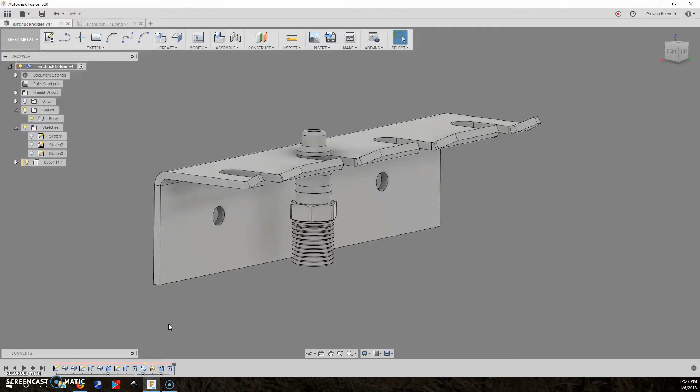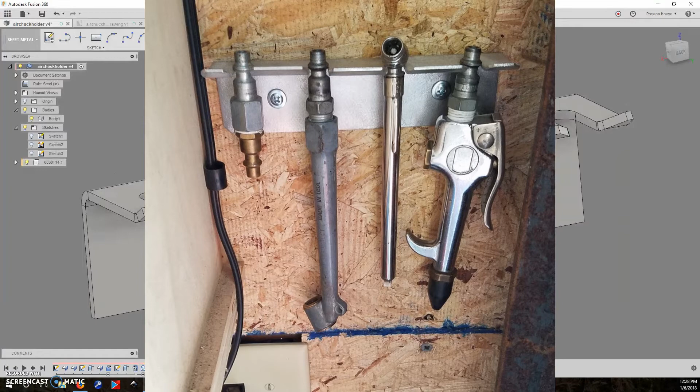Today we're going to start one of a series of sheet metal projects that I'm going to share with you. There aren't a lot of projects out on YouTube for sheet metal beyond how to build your own sheet metal bender. We're not going to do that. This project is going to be just a small hang-on-the-wall rack for my air chucks, or you can use anything that has a quick disconnect fitting on it.

This is the standard quick disconnect most people are running. If I can find what number that is, I'll share it with you. It's not critical for the design except in this dimension right here. I'll fabricate this in a second video.

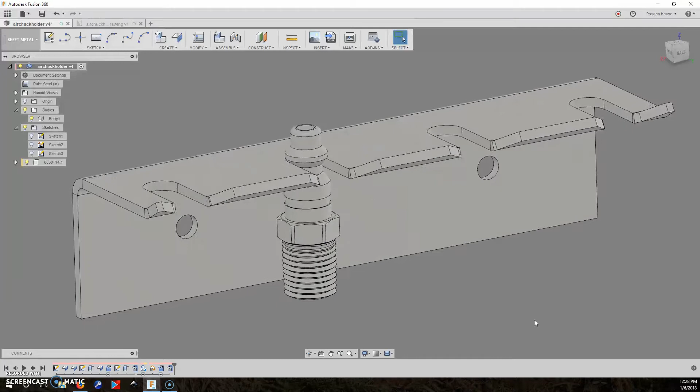This video I want to concentrate on drawing it in Fusion 360. I want to share with you some of the things I've learned around workflow and the sheet metal capabilities that are now baked into Fusion 360, as well as probably another tip or two as we go along, things I've found in the past that are helpful.

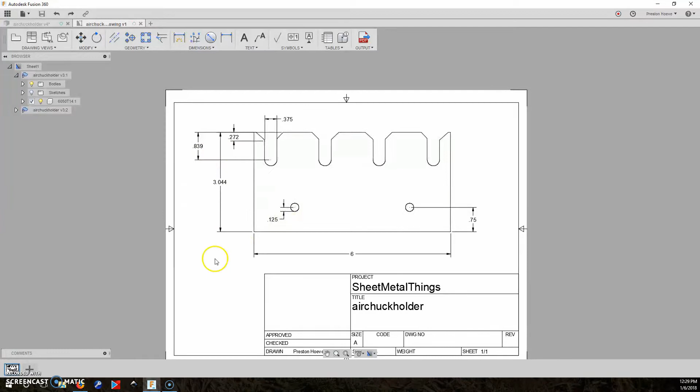Take a look at the drawing. In the drawing I've made from this original, it's basically 6 inches by 3 inches. All of these funny numbers start coming around because when you dimension in the drawing tools, it takes into account the additional material that's been put in for your bend. So now that you know what the goal is, let's get started drawing a new one.

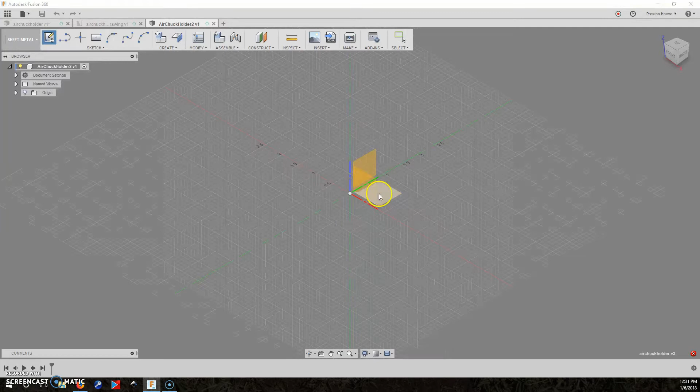We'll start a new design, and the first thing we're going to do is save it. We're going to start by creating a sketch, and what we're going to sketch is a center point rectangle, and we're going to make it some dimensions.

One of the first things that I'm going to share with you is the workflow that is becoming ingrained in my system. That is to start much like I do a woodworking project and just start big. In woodworking, a lot of times your first cut's a rough cut and you refine from there. So we're just going to draw a rectangle of some size.

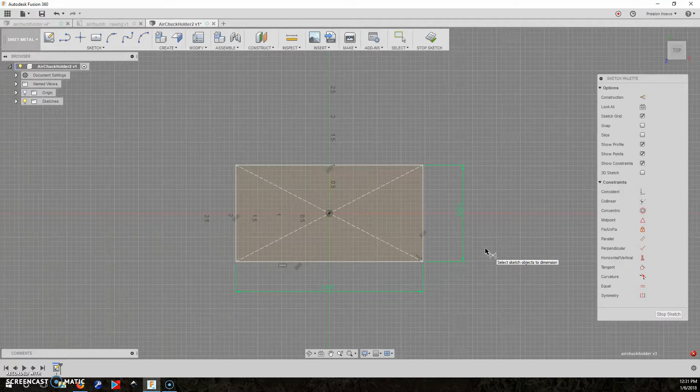And then I'm going to give you the next tip. When you're sitting down and you're drawing something like this, you don't probably already have all the dimensions. You're sort of designing on the fly, and these numbers are variable. That's the key. If there are variable numbers to you, then they need to be variables in the system.

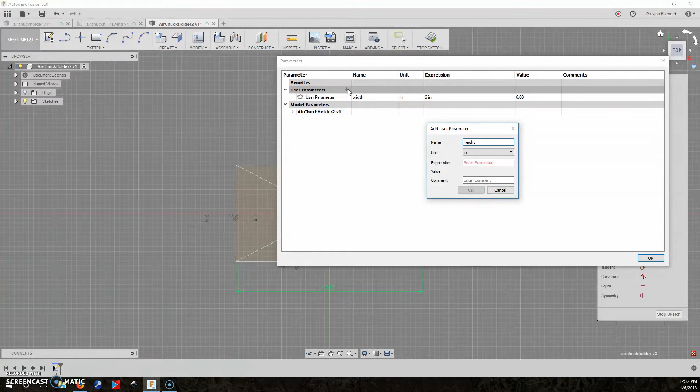So let's create parameters for some real simple things. We're going to say width, and I'm guessing it's going to be 6 inches. We're going to create the height, and this will be the height of the leg on the back. We're going to go with 2 inches, and again, I'm fairly good guess, not 100%.

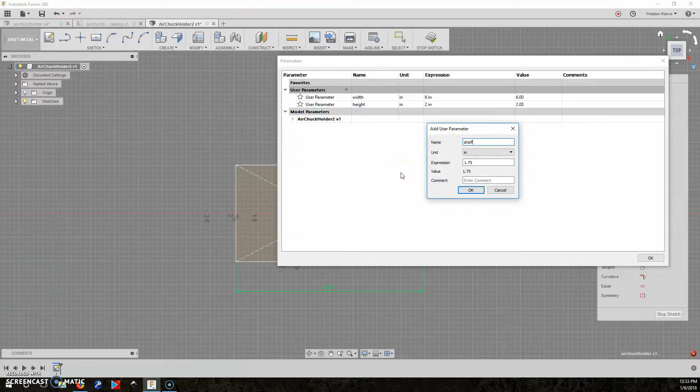The last thing we're going to do is width, and this is going to be the width of the part that comes out from the wall. That's how I'm going to consider this. We'll call it 1 3/4 inches. Oh, it won't let me call it width, so I'll call it shelf. Although it's not really a shelf, there it is.

So now we have 3 dimensions. We're going to put those in here because they are most likely going to change. We're going to assume that this is the top, looking down on where the holes are. Alright, so real simple rectangle.

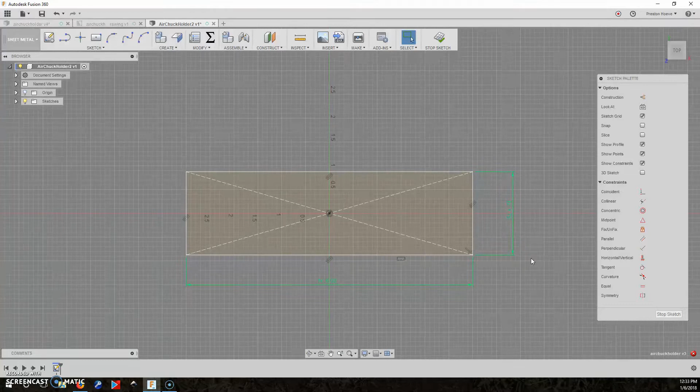In sheet metal, you don't extrude. In the sheet metal tools, we're just going to stop the sketch here, and the first thing you do is create a flange. The flange we're creating is this surface right here, and really what we're doing is we're giving it some thickness. There's a series of rules here, and we're going to use steel inches.

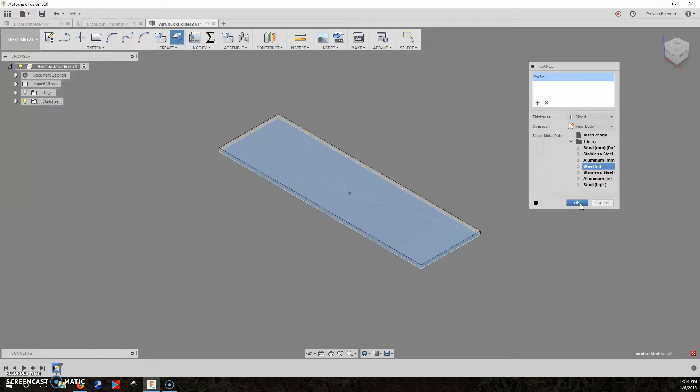I'm not going to get into these, and honestly I don't quite understand them all just yet. There are a couple other videos out there that get into these. Lars does one, but for now we're just going to go with the generic. So I've told it it's a flange, but there is the first piece.

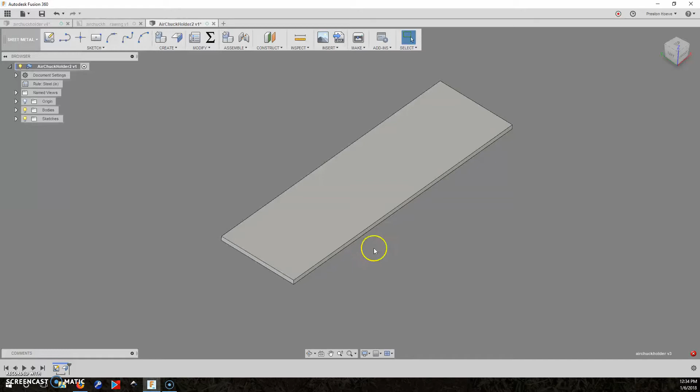So this is the top. Our holes are going to be in here. If you have geometry that's going to cross a bend, much like where the slots and the holes cross the little lifted tab and go down into this part of the body, you want to bend everything first and then do your geometry and your holes and your other sketching and extruding later.

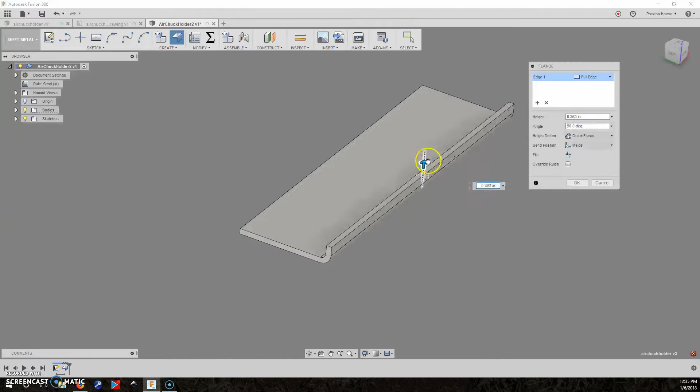So we're going to do 2 more flanges. We're going to click flange, we're going to choose this edge, and we're going to pull it up. When we pull it up, we can give it some distance. We're going to just say it's 1/4 inch. That's solid enough in my mind.

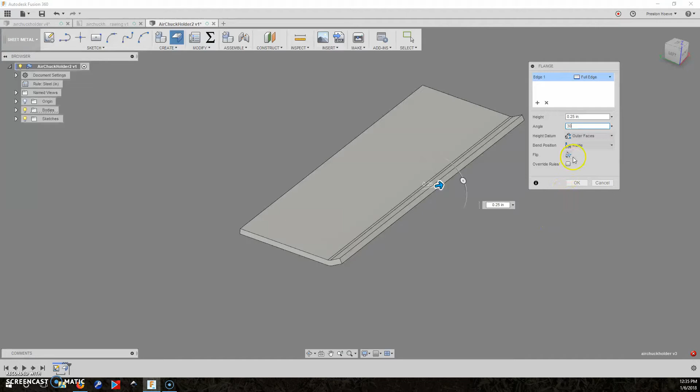I'm not going to make a variable out of it, but we only want it to go up at about 30 degrees, just a little bit of an edge to keep things from sliding back out if it's not perfect. At this point, the bend position's on the inside, and we're good to go. The next flange we're going to add will be back here, and this is going to be the height, or what we called the height there.

This is what we called the height, isn't it? Seems big. Yes, it's the height, and there it is.

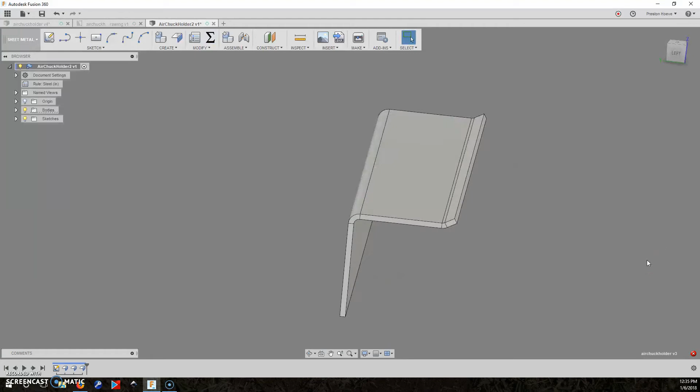So now we've bent it all up, but we haven't done any drawing yet. The reason why is you can't draw on the surface and then want to bend it. There's no concept for bending something that's already there. You have to actually create the flange on the fly.

So here we go. Everything looks pretty good. Now I can tell you right away that the height in the back is way too big. I'm going to look at a ruler and say, yeah, that's going to be maybe 1.5 inches. Alright.

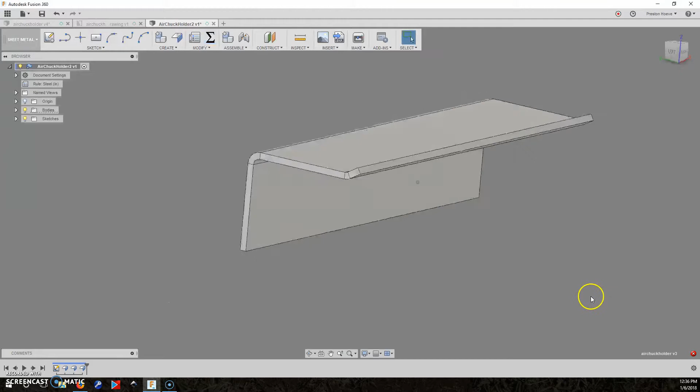That looks better. So the first thing we're going to do now is punch a couple of holes in the back, and these are real simple. We're going to make sure we're actually on the surface - that can bite you in the knees later. We're going to draw a circle, somewhere in here, and then draw another one over here.

I intentionally started drawing these out of alignment and relatively different sizes, so as I apply dimensions and constraints, you can see them better. We're going to dimension this circle right here, and make it 200 thousandths. I know I have a punch for that.

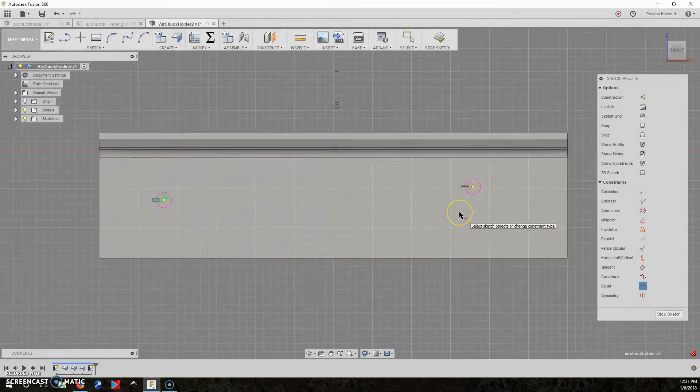Now this is where making them different sizes is really handy. We're going to make the two circles equal in size, and I saw the big one jump to smaller - much better.

Now we're going to dimension this one here from the side. Oh, let's come in there. Again, I'm just looking at a ruler trying to decide. Let's come in 1.25 inches.

And we're going to do the same thing here, so we're going to dimension that. But we are going to go over and click the first dimension, and now they're dependent. Next thing we're going to do is dimension up from the bottom.

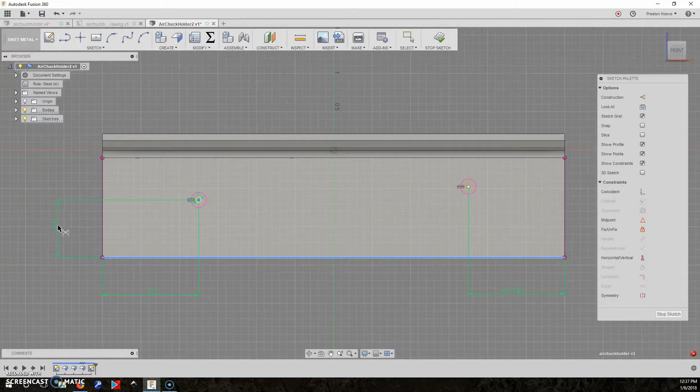And this is 3/4 inch - it's fine. It's a little high, but good enough.

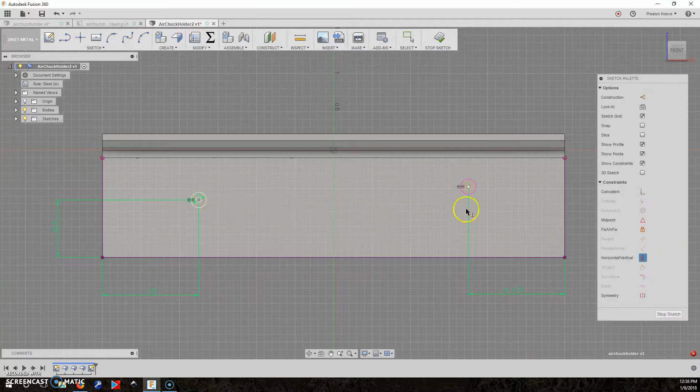And then we could dimension this one the same way, making it equal, or in this case what we're going to do is make them horizontal vertical, and it will move this one. Alright, they're both white, which in mine means they are fully constrained, and we're good to go.

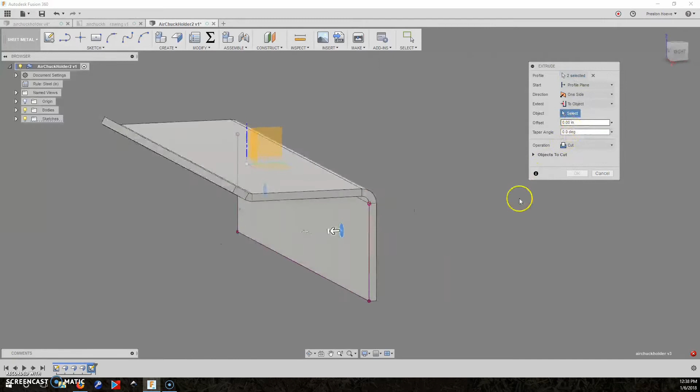I can no longer move these around. So, real simple, E to extrude, grab these two items, and we're going to do a to object, and we're doing this to the back side, and we're going to say okay.

The reason we do to object is because if we get in and monkey with the settings that develop this width here, we want to make sure the holes continue to go all the way through. Alright, so we got that one done.

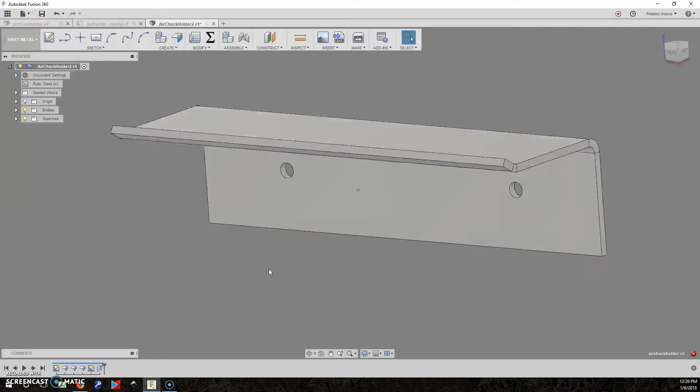Now on to putting in the holes and slots in the top surface. Lars Christensen did a good video when sheet metal first came out, which wasn't long ago, and he showed what I'm going to show as well.

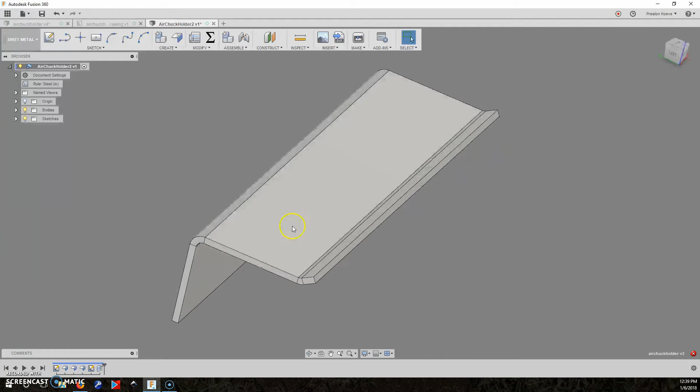So for another way of looking at it, I'll link his video in the description below. But what we want to do is have that circle and the slot, and then the tapered part of the slot span between this surface and this tipped up surface.

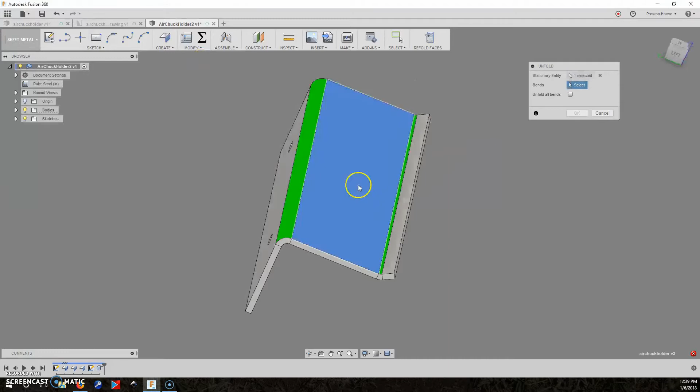So to do that, the first thing we have to do is flatten out or unfold our model. The stationary entity is going to be this one, and we're going to unfold just that edge. We could do them both, but it really doesn't matter, so we're just going to do this one right now, and we're going to say OK.

Now we're going to create another sketch, and we're going to create it on this surface here. We're going to project through into this sketch this line.

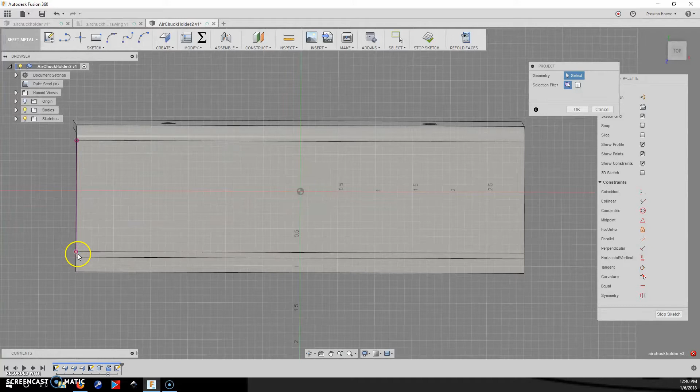This one, this one, this one, just the outer perimeter, this one, and so forth, all the way around. Alright, so we've projected those through.

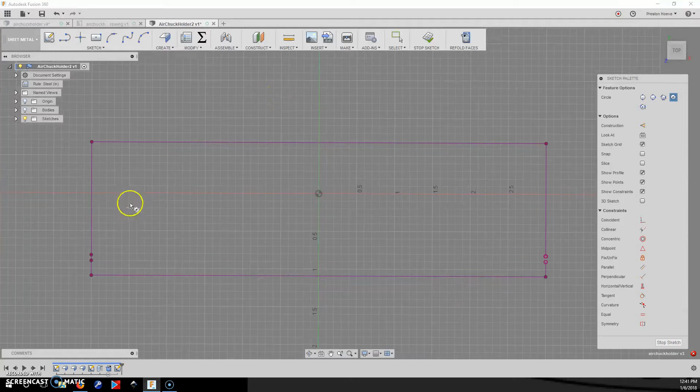We're going to get rid of the bodies behind it, so what we've got now is just that surface. We're going to start by drawing some circles - we're going to do about 5 of them, and again you can see they're all - actually I think we're going to do 4.

Now I know, because I've measured those couplings, that I want this to be 3/8 of an inch. That'll make them hang very nicely.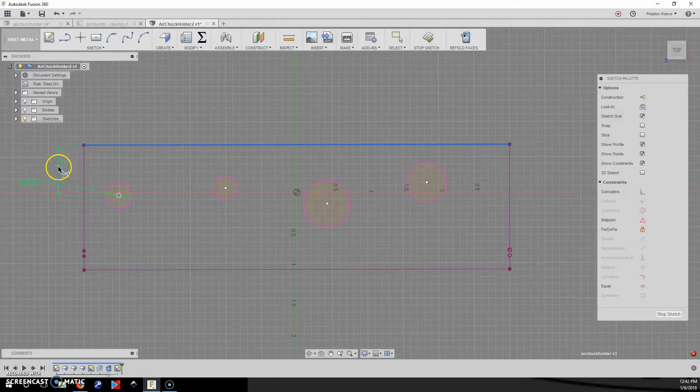We're going to focus on dimensioning out this first hole right here. So we're going to dimension this out from the back, and we're going to come out half the width of the shelf divided by 2, and I don't like that because the fold material is being taken up. So we're going to do 0.75 here. That looks better. 3/4 of an inch there.

Okay, we'll add one more dimension. Lock this to the side, and we'll set this at 1/2 inch. Looks good to me. This is where the initial drawing of things being different sizes allows you to quickly see that your dimensions and what you've meant to do has actually happened.

So we're going to use this little trick where you can go over and, instead of typing in a dimension, click another dimension already there, and it's now dependent. You can see it's now a function of that other one. So we're just going to do that on all of these.

The other way we could do this is to use the equal constraint, and we'll just do that real quick, take these out, I can make them bigger. The nice thing about the equal constraint is you can't hide dimensions inside a sketch. You can hide sketches and hide dimensions after you've left them, but not while you're drawing. So the fewer of these you have laying around, the less cluttered you are.

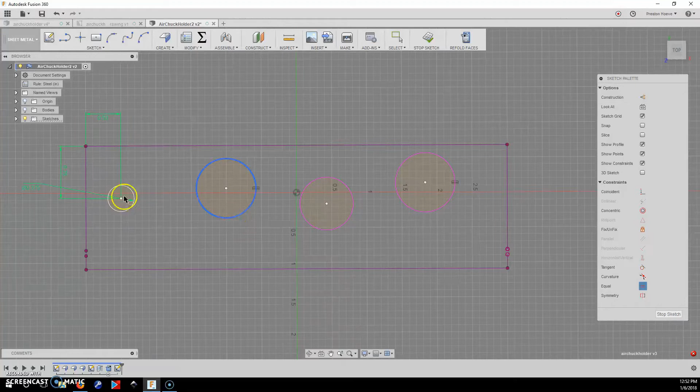So we're going to use the equal constraint, and we're going to say this circle is equal to this circle. You see it jumps in size really quickly, so it's real easy to tell that, yeah, I got what I wanted. And that one's already had an equal on it.

So now that we're done with those, we're going to do some other things. We're going to make all of these horizontal to each other. So we're going to pick horizontal vertical, and pick the center point of the circle. Again, because I drew them all out of whack on purpose, I can see them jump real easily into line, and I know I got what I wanted.

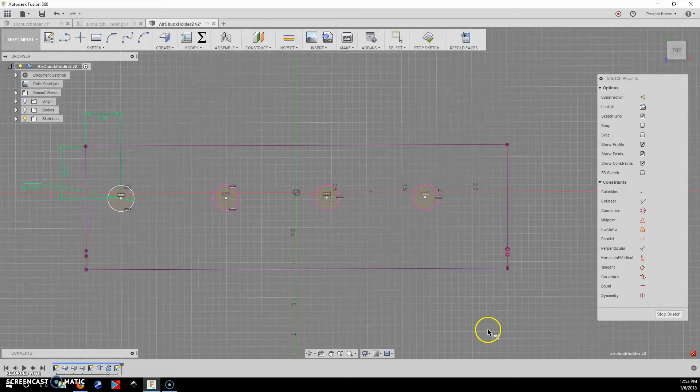So the next thing we're going to do is add some dimensions between these circles. And we're going to start with... let's try, no, that ain't going to be right. I can tell just looking. This is one of these deals where, to follow my own rule, this should be a parameter.

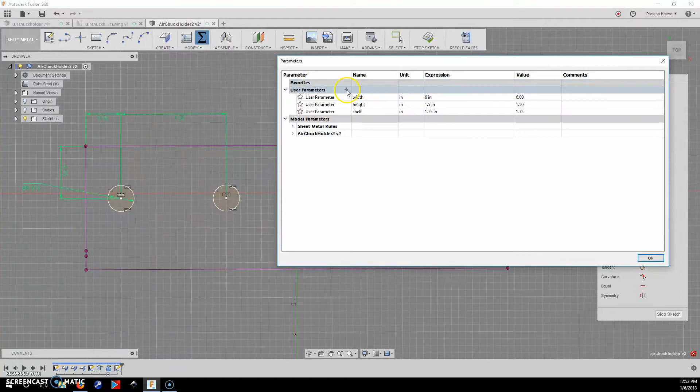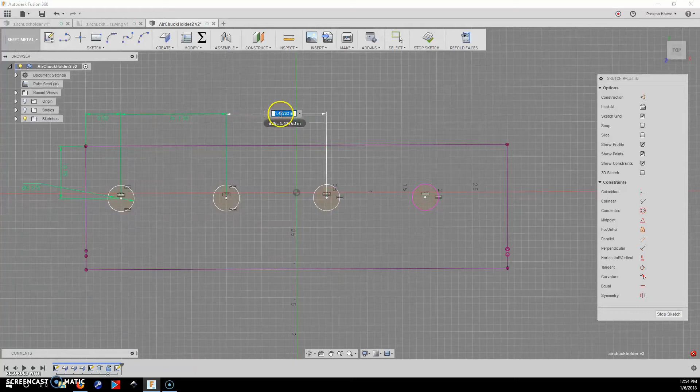So we're going to add a new parameter, and we're going to call it hole space, and we're going to call it 1.5. Change this here to hole space, and we're going to dimension from here. We're going to go from here to here and up, and I could either type hole space again, or I could go over here, and now we have actually two levels of dependency: from these two holes to this dimension, and from that dimension to the actual parameter setting.

Now we're going to add one more dimension, down here to the end. Fusion's going to tell me that I'm over-constraining, but I'm going to say I want to see it anyways, so I can look at this and say, well, that's an inch, this is 1/2 inch. If I change this one to 3/4 of an inch, boom, they all move over.

Now, if someone knows how to create that equal spacing between objects within a distance, leave a comment below. That'd be kind of interesting. I wanted to do that the other day too.

Alright, moving on. The next thing we've got to do is draw in the slot and then the tapered opening. So we'll create some simple lines. Again, they're not in the right place.

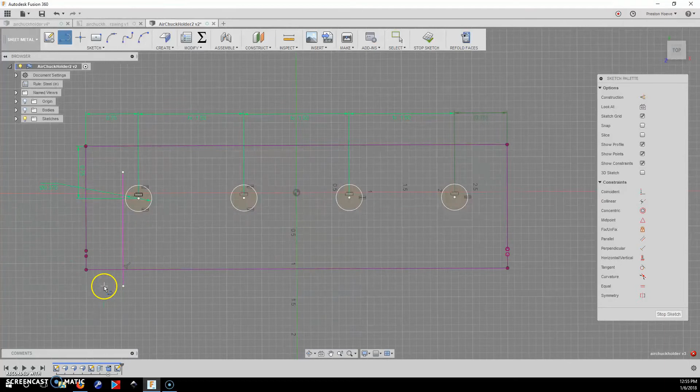So now that we have the lines all in here, we're going to make them tangent, because we want them to run right up next to the side of that circle. This is, instead of moving your geometry, you're letting the constraints move it for you. Again, I drew them way out of place so I could see them very easily snap into where I wanted them to be. Alright, so there we go.

That's all of those. We can leave these hang out here. We don't really care, or we could bring them back and constrain them if we wanted to. We could say that this dot here is coincident with this line, and we could keep doing that. It's not important, so I'm not going to bother. We can still select or see these two major areas, and that's what we want to be able to extrude.

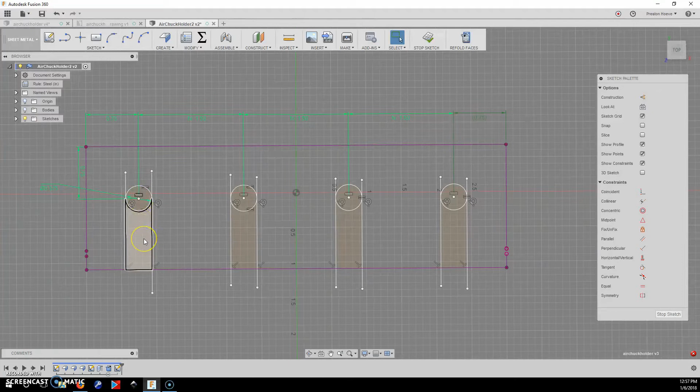So the last thing we're going to do is create another line, and we're probably going to try this a couple of different ways.

We're going to do two lines like that and say we're done. Then we're going to dimension from this line to this line and pull out here, and we're going to say that's 90 degrees.

Now we're going to create another line, and we're going to come off that center circle down through the bottom, and click it one more time, and click construction over here, or I could have done an X.

So now what we can do is say that this point here is coincident to that line there. Then we can do one more dimension, from this line to this construction line. Come on, you started to come out there the way I wanted it. Now we can do one more dimension from this line to this construction line.

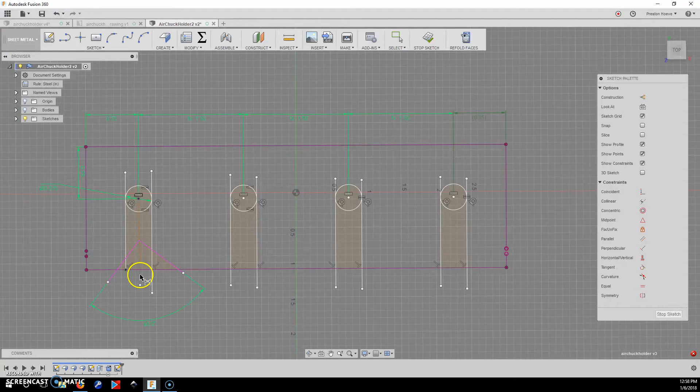And why are you not playing nice? There we go. We're going to say that this is 45 degrees. So now it's locked into that center. It's 45 degrees to the center line. The two lines are 90 degrees to each other, or we could have put a perpendicular constraint in there if we wanted.

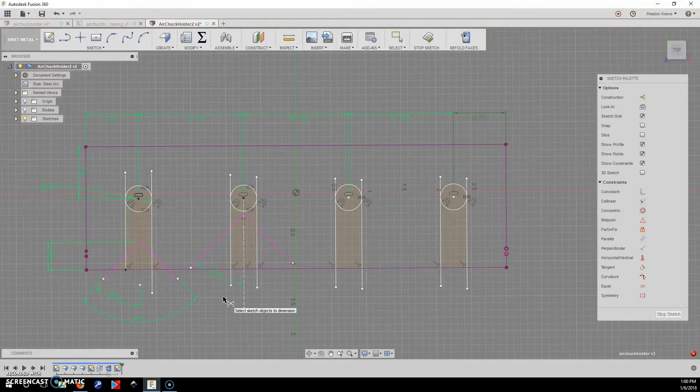So now what I need to do is repeat that all the way across here. There we'll use perpendicular, and then here we will dimension between these two, and I'll force that to 45 and it'll swing around. I'll do a dimension from that point to this line, and make it go over here, make it equal to this one, and they drop right down.

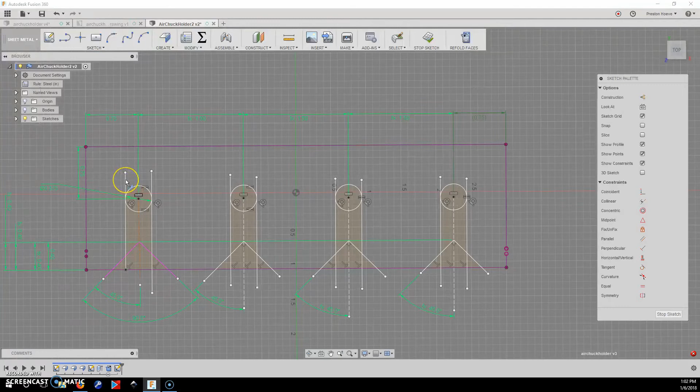Alright, now they all match. Now we can do some things to pretty the sketch up if we want. Namely, what we can do is grab the trim tool, and we can go in here and trim some of these lines. Well, it gave it to me a second ago.

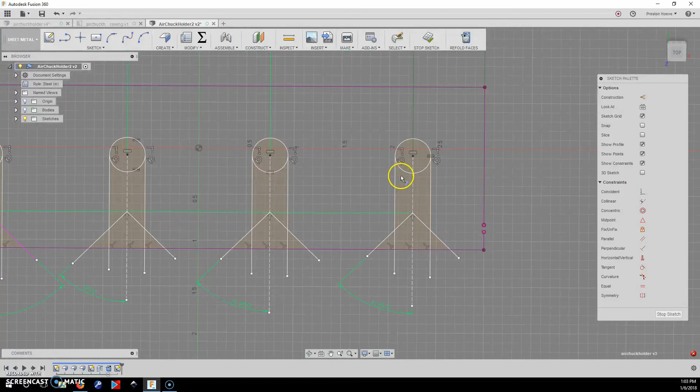And we could do even more. We can get rid of these half circles in here. Get rid of these, get rid of this, get rid of this. And now it's just all one big body that we can select when we go to extrude it. But that's a lot of clicking, and for a project that's this simple, I don't think we're going to bother with it. So let's go right to E to extrude, and we'll go through and select all these pieces.

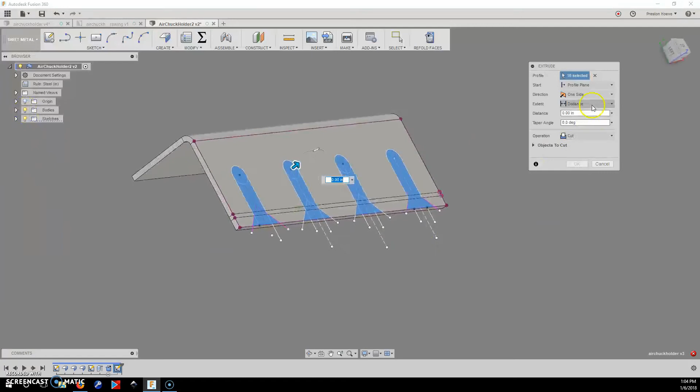Okay, so yeah, it was easy. Alright, we're going to turn the bodies back on so we can see them. And we're going to do objects to cut again for all the same reasons we did it before. We're going to extrude to back there. It's set to cut, which it assumes, and we're going to say OK.

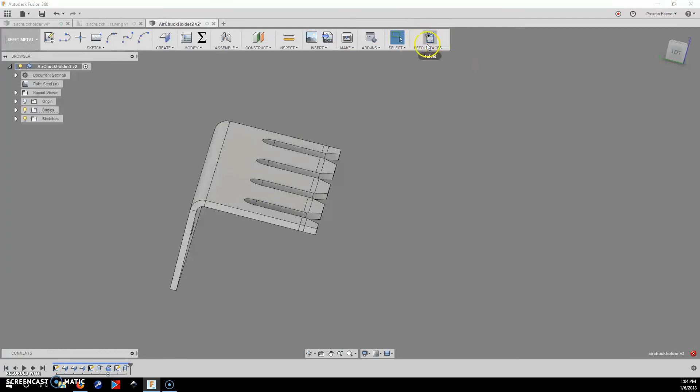And there they are. The next thing we have to do is refold this. This took me a minute because it couldn't have been any bigger - it's right up here where capture location normally is. So we're going to say refold, and it's going to put back in that fold, and there we have it.

Okay, with the basic model done, I'm pretty happy with this, but just for giggles, let's insert an actual fitting in here.

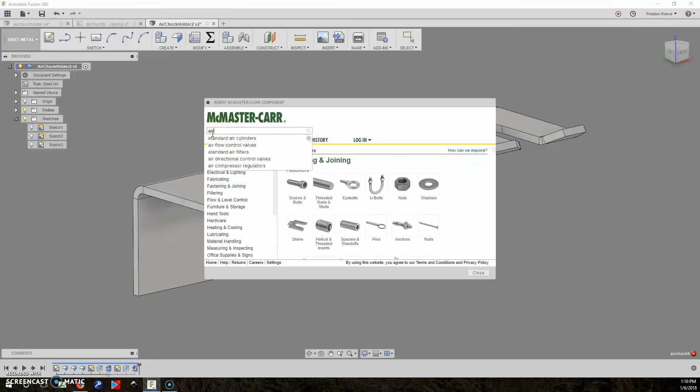Here, come on, McMaster-Carr. Air hose. And boy, that was a lot of description right there.

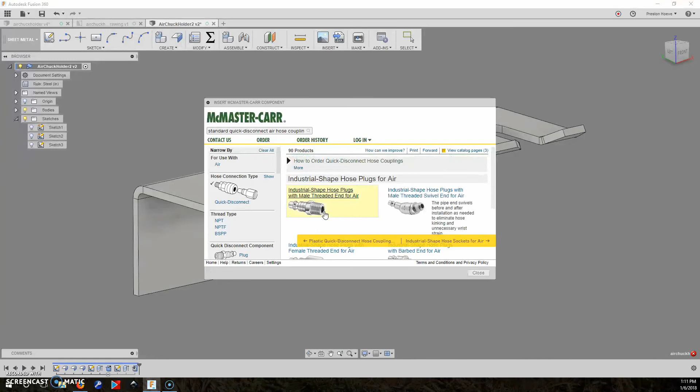Go to quick disconnect. And again, I don't know exactly what model I've got, it's the most generic of them. This will work for demonstration purposes. We're going to get one for a quarter inch hose, we'll pick the cheap one. And we're going to go to product details.

Scroll down in product details and you can see where you can save off a drawing, and I save off the step drawing, the 3D step, and it puts it in my model.

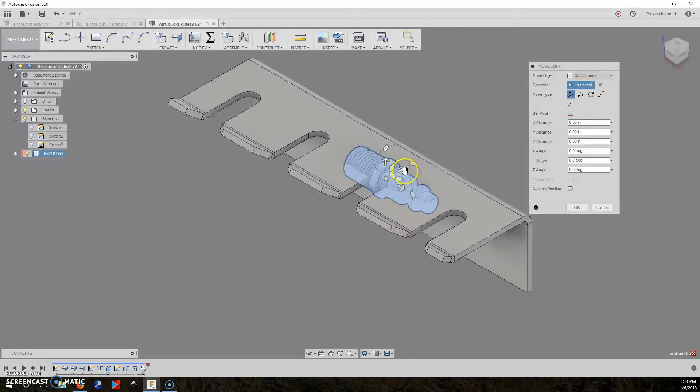Now here's another tip I want to tell you about. When it comes to moving things, there are 4 different ways to move things around: free move, translate, rotate, point to point, and point to position. You can do all of these in the same process.

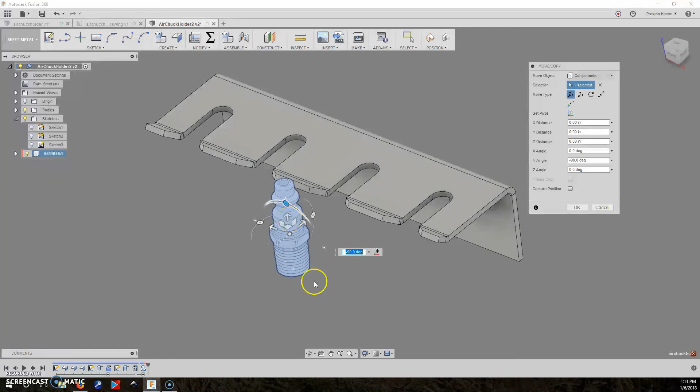So in the free move state, we're going to take and rotate this thing 90 degrees. Then we're going to switch to point, and this happens to be my favorite. We're going to pick the circle right here, and go over here, and it's going to give me the center of this back radius. So we're going to pick that there.

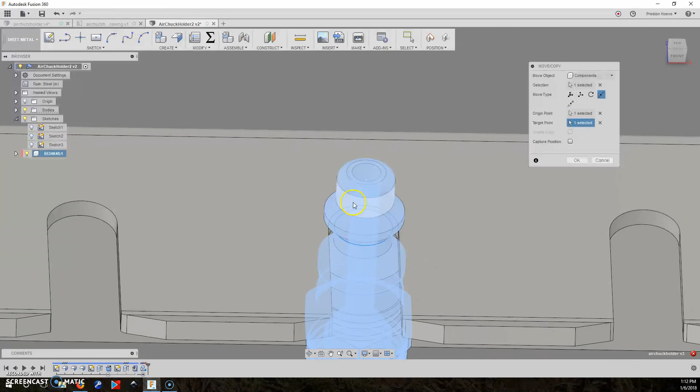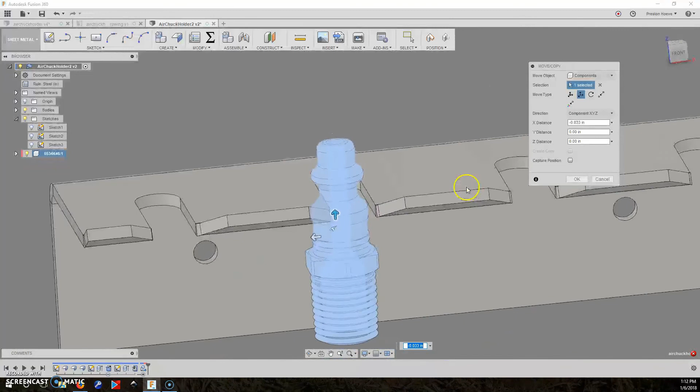And we're going to look and go, man, that looks pretty good, but you know what, I want to fudge it down a little bit just so it looks right. So now we're going to switch to translate and bring it down here. For a visualization standpoint, that looks pretty good. I can spool around here. Yep, everything looks great, and we're going to just say capture position and OK.

And there it is. So when you're doing a move, remember that you can use them in combination as you go along. Now that we've got the air chuck represented, I see a couple other things that I don't really like. First off, I feel like the slots are going too far to the back.

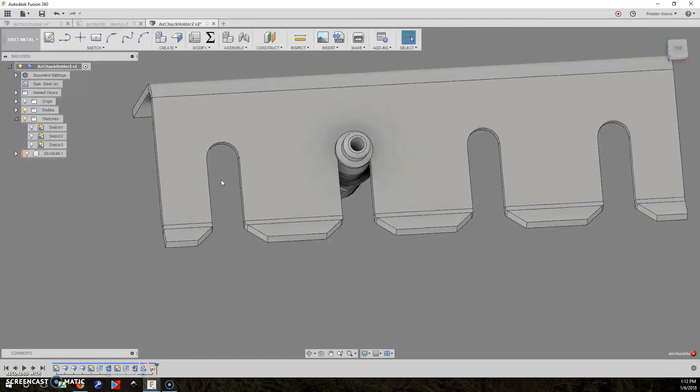And unfortunately I didn't dimension it in the past with a parameter, so we're going to go back and do that now. We're going to type in slot depth, and I think we made it like 0.75. It doesn't really matter. So now we've got a parameter called slot depth.

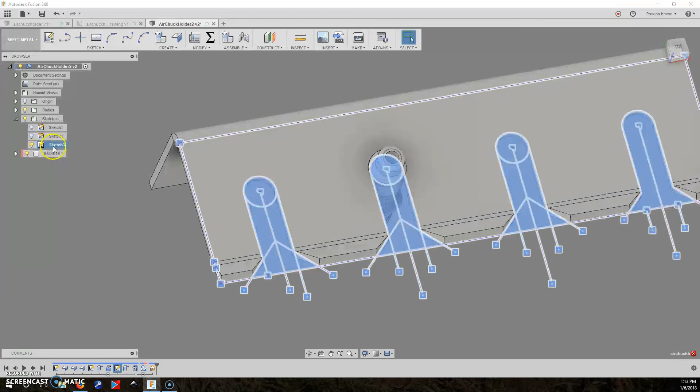We're going to go back to this sketch here and turn it on. We're going to make sure that we are back in the main part of the model, and we're going to right click and say edit sketch. It's this dimension right here that we want to change, and we're going to make it say slot depth, okay, 0.75. And we're going to stop the sketch, and nothing really changed except the sketch is on.

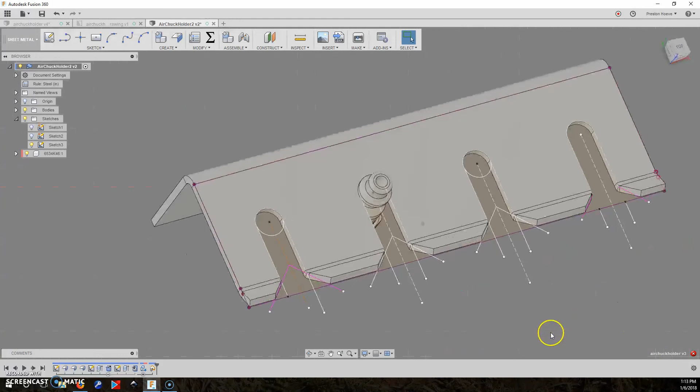So we'll turn that off. Now we can take this parameter and we can change this parameter. So let's change this. Again, we're measuring from the back forward. Let's make this 7/8 of an inch. That was right, 0.875 is 7/8 of an inch last I checked. And we hit return and it moves.

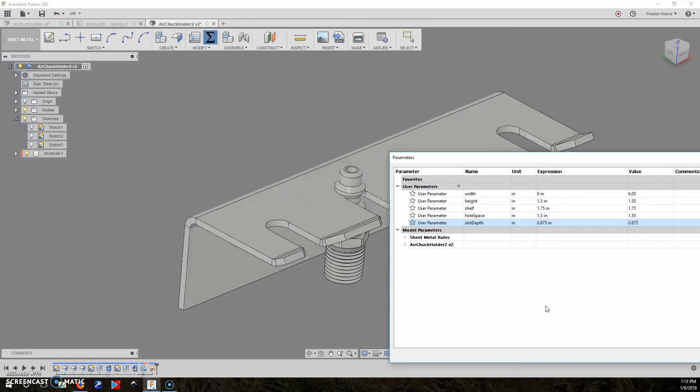Now, unfortunately, we didn't create a joint on the air chuck, so it didn't move along with it. Shame on us. But that gives us a much nicer slot. For now, we'll just hide the air chuck.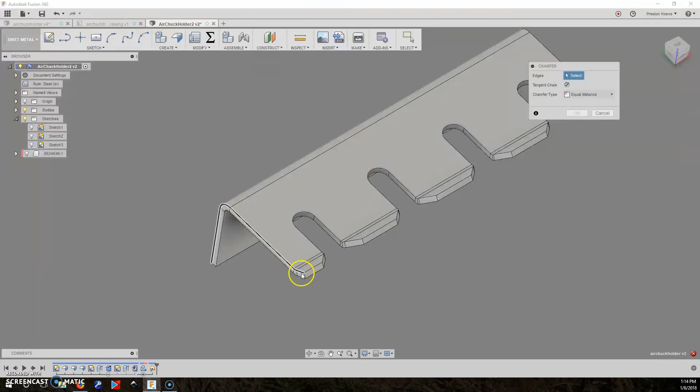The other thing I want to do, putting this away, is this is strictly for modeling. If I was to take this and want to cut this entirely on the CNC plasma cutter, this would be more important than it is today, because when we actually build this in the shop, we're just going to do this by eye. But what I want to do is I want to create a chamfer, and I want to chamfer that edge, that one, and that one.

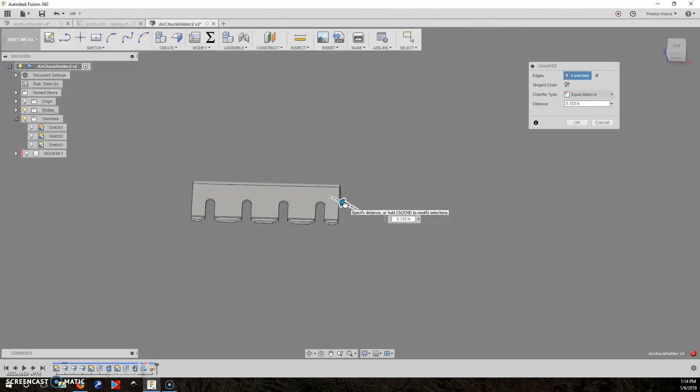And we're going to visually move it in until it just looks about right. That's the TLAR method if you're not familiar with it. TLAR stands for that looks about right. So we're going to take that right there, say OK, and there's our part all prettied up.

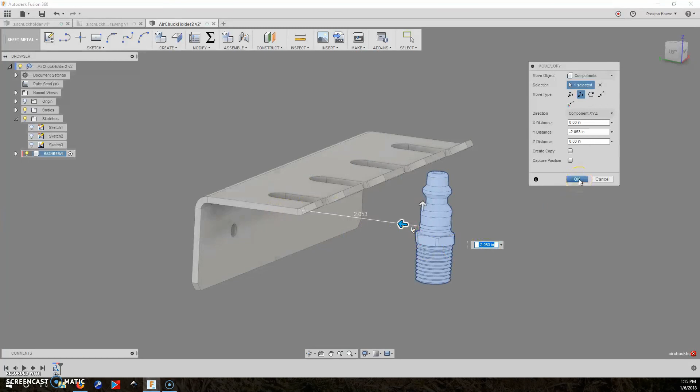Okay, fine, I'll create a rule. We're going to highlight this and move it out. We're going to use translate so I don't accidentally screw something else up. We're just going to put it out here. We're going to say OK.

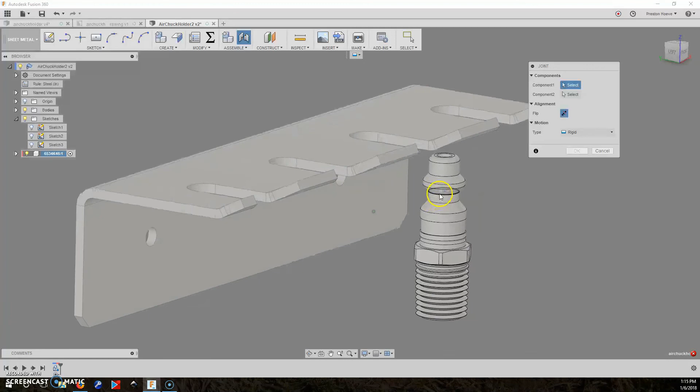And this time we're going to move it a lot like we were moving other geometry around, by creating a joint. It'll ask to capture the positions, and we'll do that. We're going to create a rigid joint, much like that move was. We're going to select this component, and we're going to select that circle. Then we're going to go up here, and select the same circle. And it's going to move over there into it.

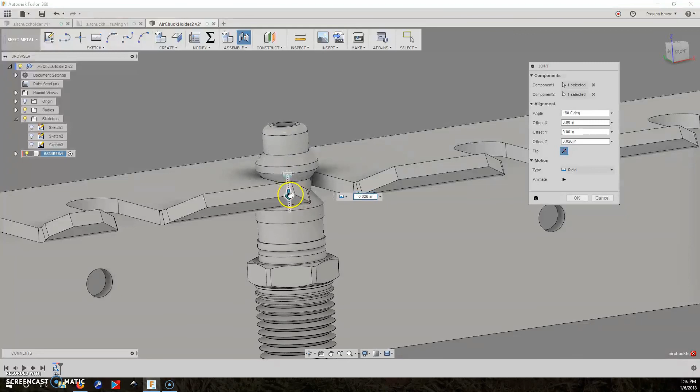Now you notice we're up high again, and I kind of wanted it down lower. We can take this arrow and drag it down a little bit. You'll notice it's changing our Z offset, which is fine. Okay, that should be just fine the way it is. We'll say OK, and now it's in there with a joint.

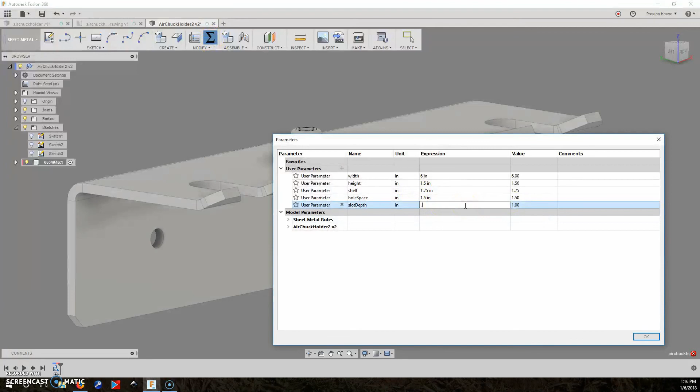If we go and change this dimension here to say 1 inch, it moved with it now. There we go. Now it's more like we know what we're doing. Let's go back to 7/8. We're going to call that done enough.